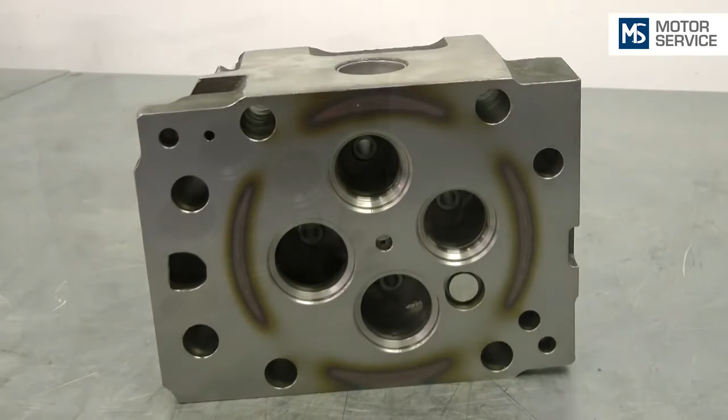The cylinder head was cleaned before assembly and checked for damage. If used parts are reused, they must be checked for damage and signs of wear.

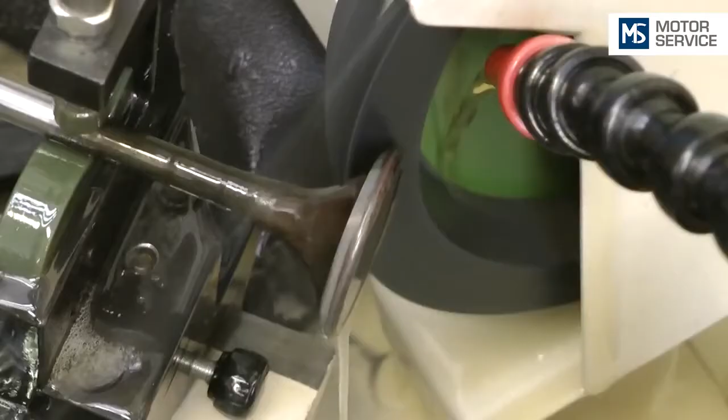The sealing face on the valve head must not be staved in. Slight wear can be removed through rework on a valve grinding machine.

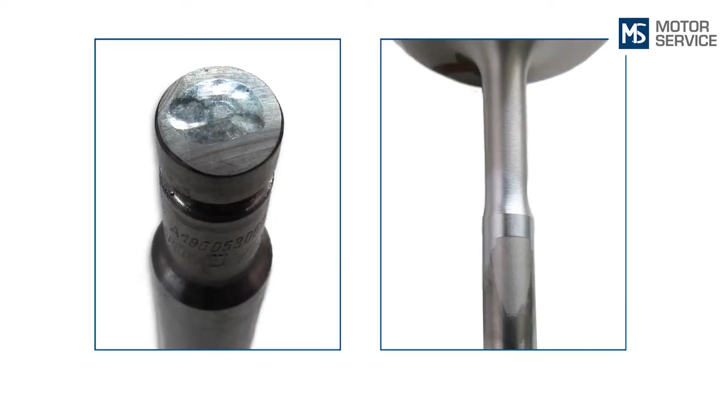The valve stem faces and the stem surfaces must not be damaged. Valves with damage in these places must no longer be used.

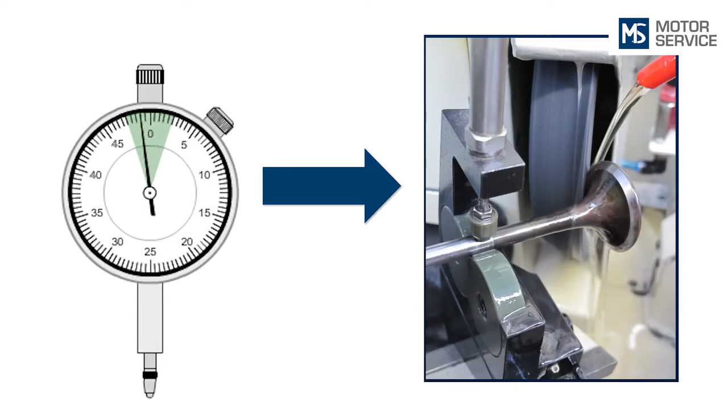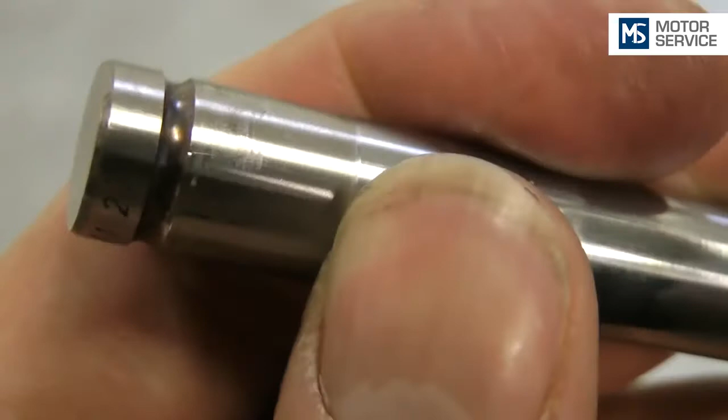Rework should be avoided. The grooves for the valve cotters must not be worn. Important: only new valve cotters should be used for safety reasons.

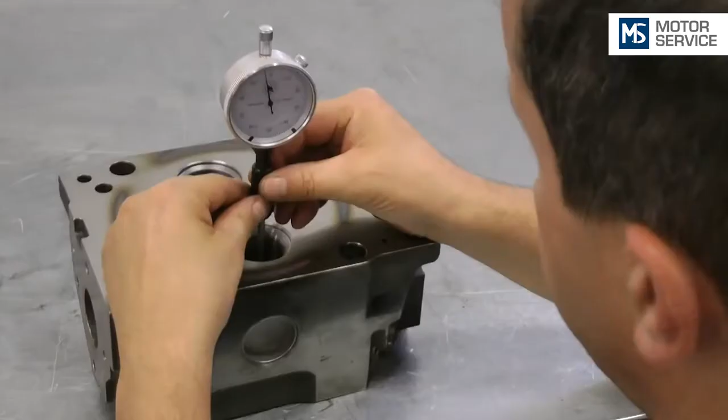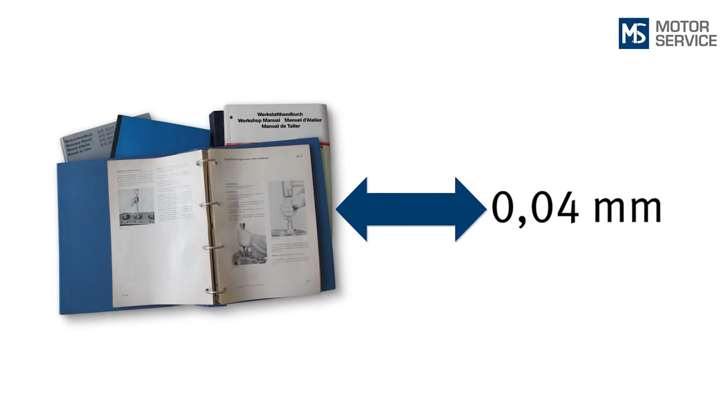To determine the valve guide clearance, the diameters of valve guide and valve stem are determined and deducted from each other. The determined clearance is compared to the nominal values of the engine manufacturer. If no manufacturer information is available, the guide values from the table can be used.

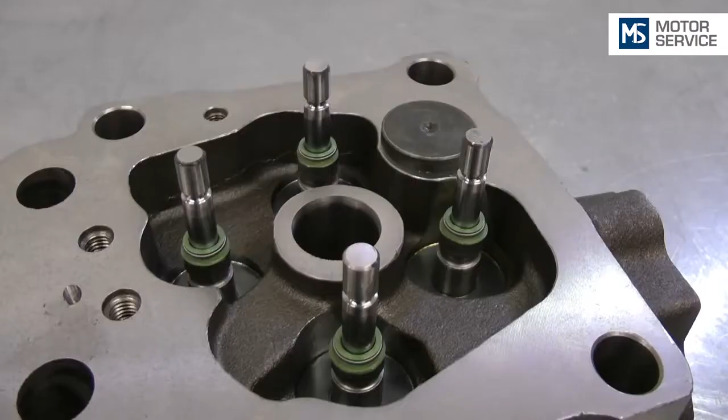After checking the valve guide clearance, the freedom of movement of the valves must also be checked. The valve stem seals must not be installed for this. The clean valve must glide into the clean valve guide without resistance during testing.

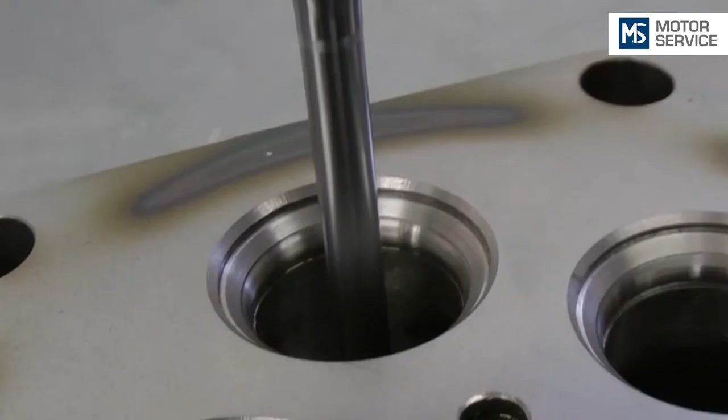If the valve does not jump back a little upon impact, there is a problem with the clearance or geometry. The valve guide must be cleaned again and reworked with a reamer if required.

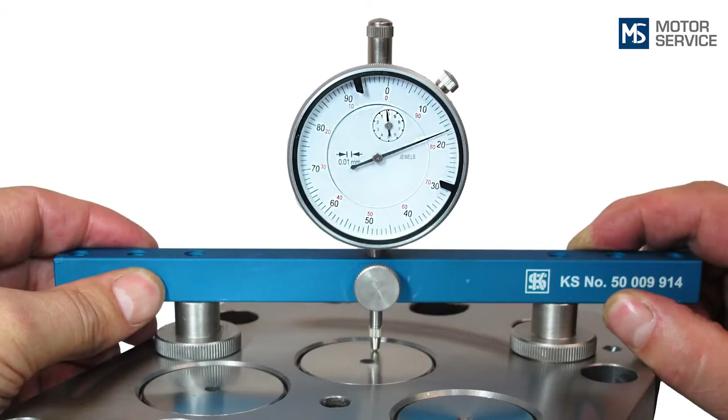The correct valve recess or valve protrusion is a prerequisite for smooth interaction of all components. Thus, the dimension specifications of the engine manufacturer must be adhered to.

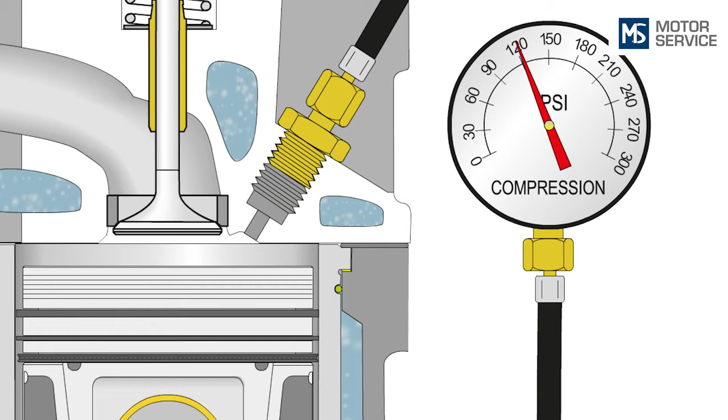If valves are positioned too deep in the cylinder head, this results in diminished compression. If a valve recess that is too big is detected, it is probably the wrong valve or an excessively reworked valve. Such valves must not be used.

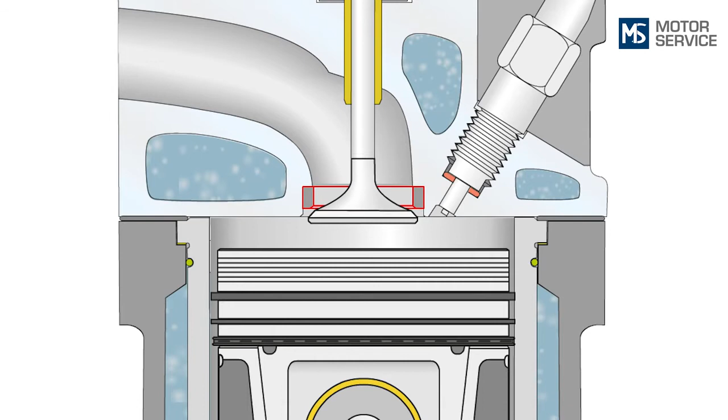If valves protrude too far into the combustion chamber, these can collide with the piston during operation. If the valve dimensions are okay, a valve protrusion that is too big can be corrected by reworking the valve seat insert.

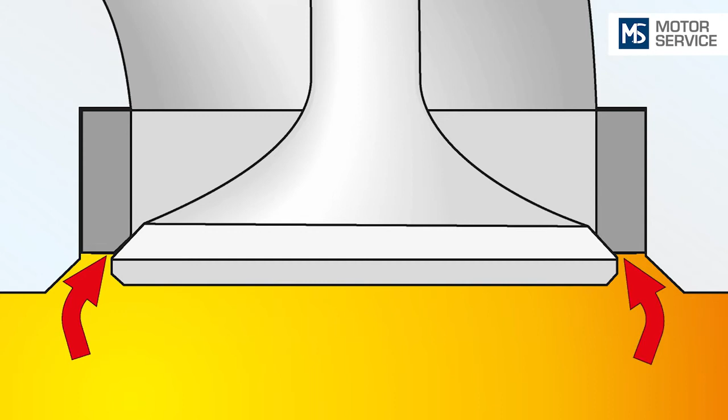The tightness of the valves is the most important prerequisite for trouble-free engine operation. Leakiness results directly in irregular engine running, loss of power and motor function, and burning through of the valves.

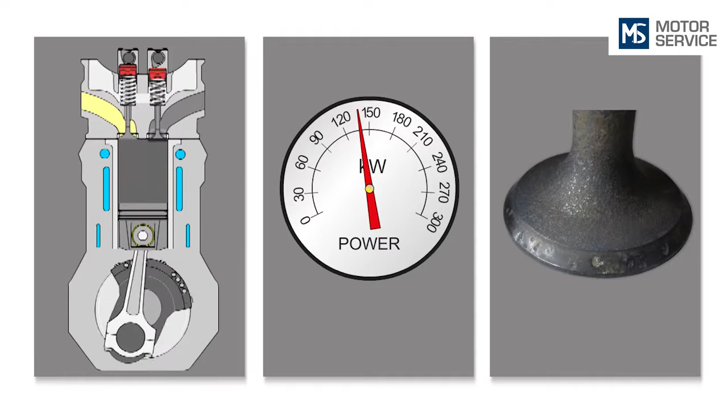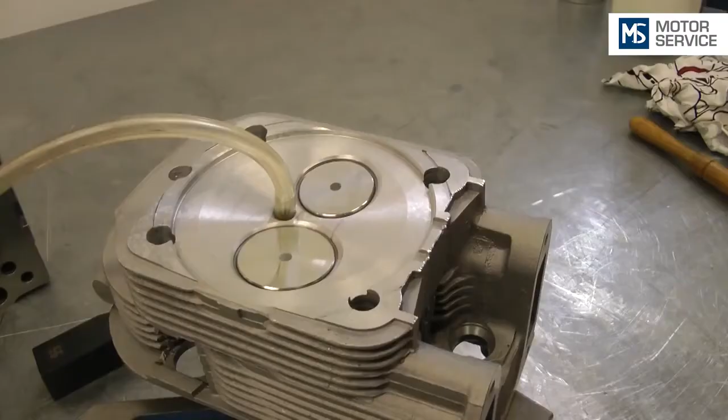The valve tightness can be tested from the duct side with a low-pressure testing device. Alternatively, the tightness can also be tested with a small amount of fluid like, for example, petrol or petroleum.

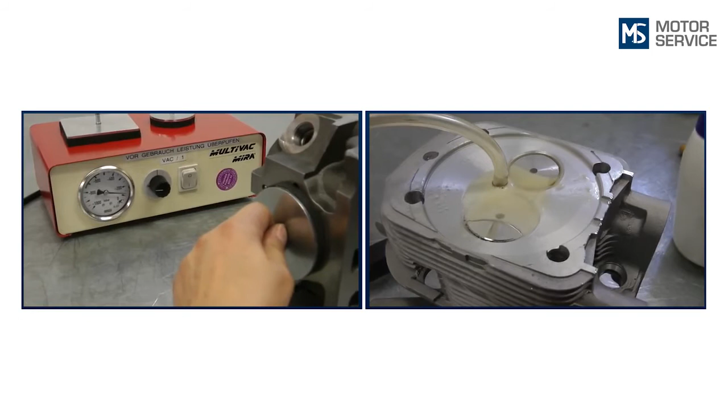If no low pressure is built up, or if the liquid flows very quickly between valve and valve seat insert, the valve is not tight. Tightness can be achieved through grinding.

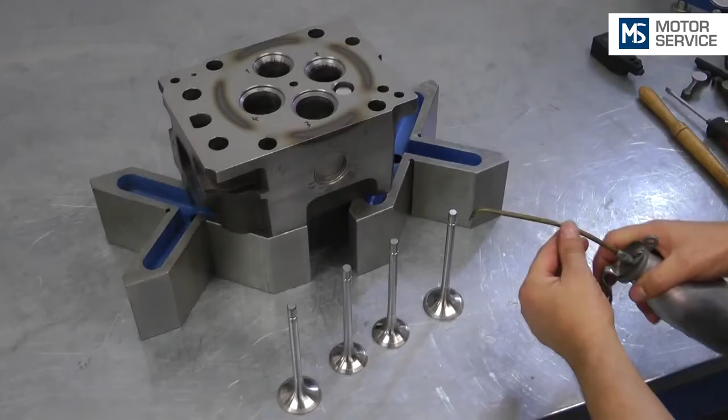Before assembling the valve stem seals, the valves are oiled and moved into the valve guides. Before the valve stem seals are assembled, the washers or valve rotators must be inserted.

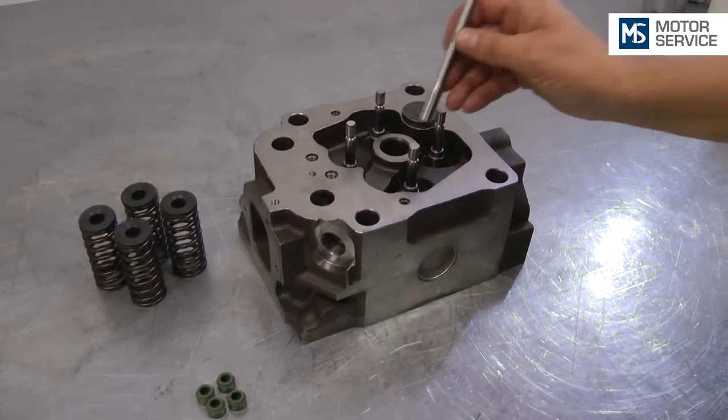For the valve stem seals not to get damaged during assembly, a protective bushing is used. Oil facilitates assembly of the seals.

Valve stem seals with a supporting body made of plastic are pressed onto the guides manually with a suitable assembly tool.

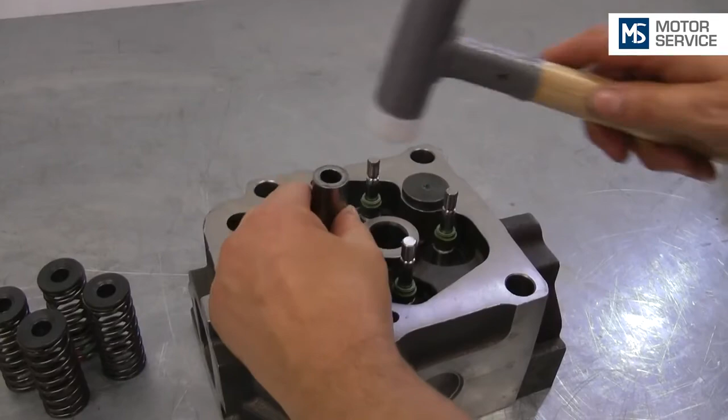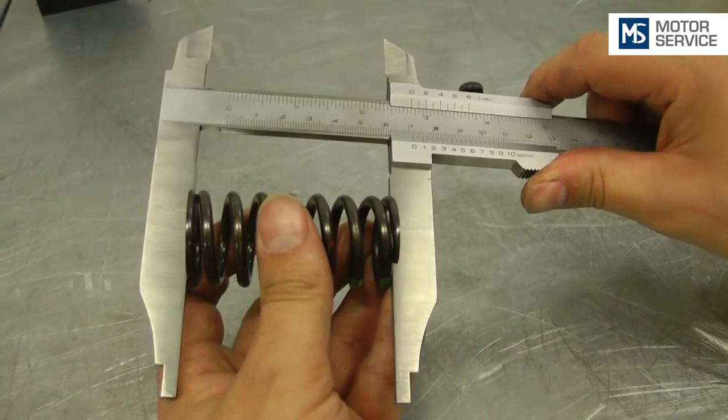Attention! The valve springs must be checked for perpendicularity and length before they are inserted. Bent valve springs must be replaced.

Following assembly of the valve springs and insertion of the valve cotter halves, the cylinder head is ready for assembly.